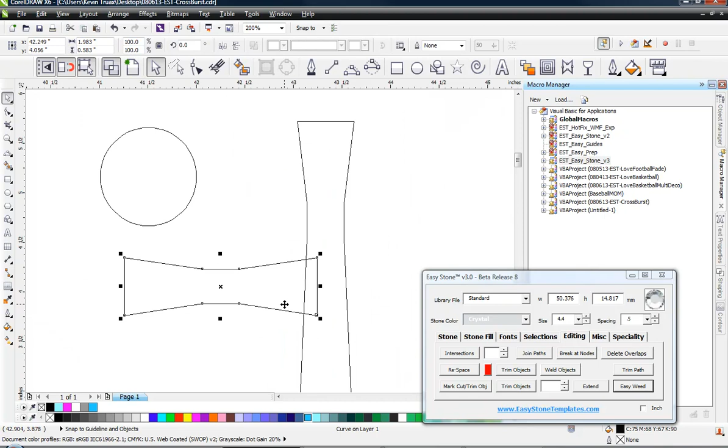So what we want to do, first of all, is take our circle piece in the middle and just make a smaller version of it. So all I did was simply start dragging it, holding my Shift key. It will drag to the center, and then right-clicking to make a duplicate of it. Now I'm going to resize my cross and all its bits to 7 inches tall, or thereabouts. You know, you can kind of play with that value a little bit. And then what I want to do is take all the pieces but my duplicated circle. So we'll go ahead and select this piece, and this piece. Come to the editing tab here in EasyStone and choose Weld Objects, and that will weld them, leaving this circle.

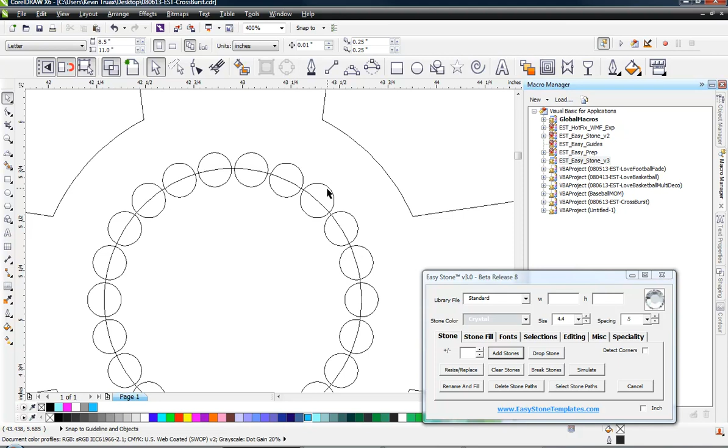And then what we're going to do is come to the Stone tab, and we're going to choose Add Stones. And that will add a series of stones. Now, I have to determine how much space from the stones to the edge I want. And maybe I want less space. So what I'm going to do is stretch it out, again holding my Shift key, stretch it out. And we're going to add some more stones. So I'm going to delete this value because we don't want 22 stones, we want it to recalculate. So when I hit Add Stones, then it will recalculate. And it shows us now we have 25 stones along that path.

Now, I might just drop this down 1 stone, and I'll show you why here in a moment. But now what I want to do is take these stones and break those stones from the path that they're on. So we'll hit Break Stones. And then I'm going to take this stone, which is right at dead center—that's why I lowered the stone count 1. So now this stone is right dead center.

And we're going to come over to the Stone Fill tab, and we're going to hit our right arrow. And then watch what this does—this is another little side point. Obviously, if we hit the right arrow, we make another circle, right? But there's some modifier keys that we can use as well. So if we hold down the Alt key and hit this arrow, you can see what it does—it actually moves it 1 whole stone. Now, if we hold the Alt and Control keys down, then it will nudge it, but only half a stone distance. So those are the modifier keys that we have available.

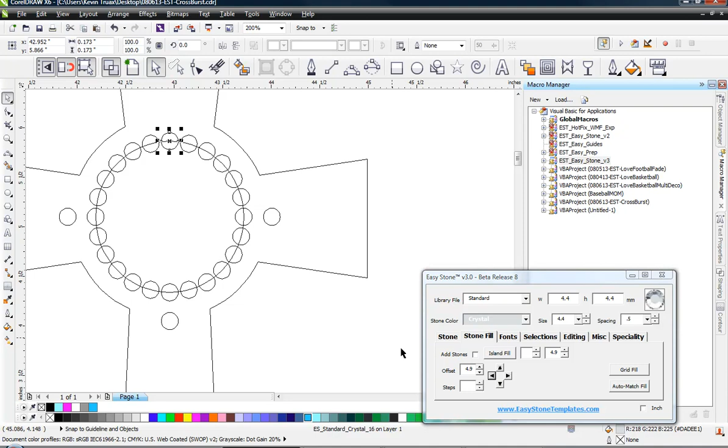So we're going to duplicate the stone and then hold down the Alt key. That will nudge a full stone, and if we hold the Control key in addition to the Alt key, it will nudge, but only a half a stone. And that's what we're going to use. So over, Alt Control, over to get the nudge. Up, Alt Control, up to get the nudge. All right, so that is now what we have available to us.

You can see it looks really nice and symmetrical and what have you.

Now the next step is to work our heat press vinyl object and cut some holes. We could do something really simple: select these 4 outside stones just to show the example, then select our cross, and come over to the editing tab and choose trim. That will cut a hole in our vinyl material the exact same size as our stone.

But here's where the problem is. The rhinestone we're using to create a template is 4.4 millimeters, but the rhinestone itself is actually only 4 millimeters since we're using an SS16 stone. So if we do it the way I just did, our circle size in the heat press vinyl material will be bigger than our rhinestone, and you'd see a tiny edge around the perimeter where the shirt color shows through.

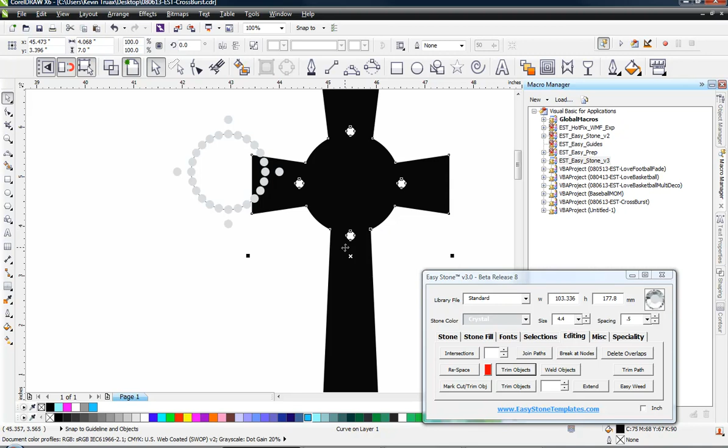So what we need to do is create a circle that is smaller than our rhinestones. If I move this out of the way, you'll see it actually cut 4 circles, but again these are 4.4 millimeters, bigger than the rhinestone itself. That certainly has its place—we may want that effect to have a little rim around our rhinestone, which can add design appeal. But in this case, that's not what we're looking to do.

So we have a built-in functionality here inside EasyStone that's a bit hidden we want to show you. We'll select one stone, then select by fill, create selection. That selects all the stones of that same color. There's actually a defined path, a stone path in there as well, which is why I went through the trouble of asking EasyStone to pick up all stones matching that color, so our defined path is not selected.

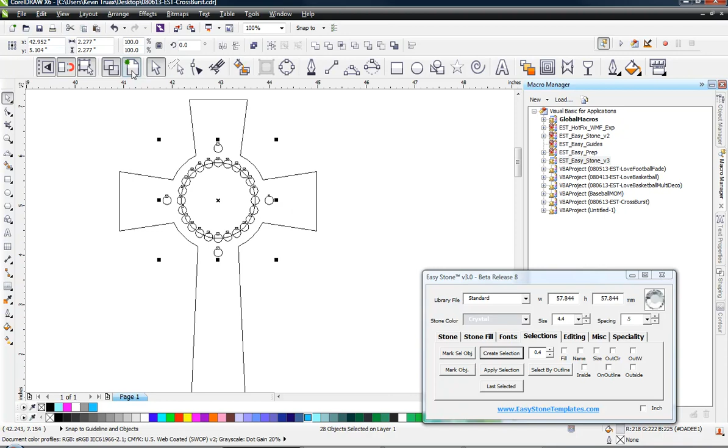So now we have this selection made. But actually we need to back up here and go to the editing tab because we're going to trim our cross piece. We hit mark, cut, trim, and select all of our stones, but we also have our defined path selected, so we'll shift select that to get rid of it. Now we just have our stones selected.

For the trim we're going to use -1 millimeter, and this is where the modifier key comes in. Just like before on our stone fill, we had the Alt and Control options. Well, with Trim Objects there's also an Alt option and a Control option. So if we hit Control Trim Objects, watch what happens—you don't really see anything happen.

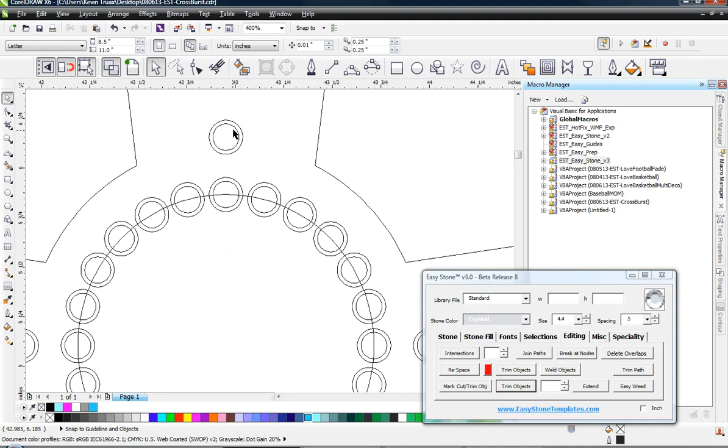But if we go into wireframe mode, then we can see what happened. We got one circle, and then a circle to the inside of that. Now we can see what's happened here—we've actually cut a hole inside our heat press vinyl material.

So I'm going to go back to enhance mode, and I'm going to pull this out, and I want to show you something. I don't want to make this overly complicated, but I do want you to have a good understanding of what's happening so that when you try this project, you'll know exactly what's happening and why.

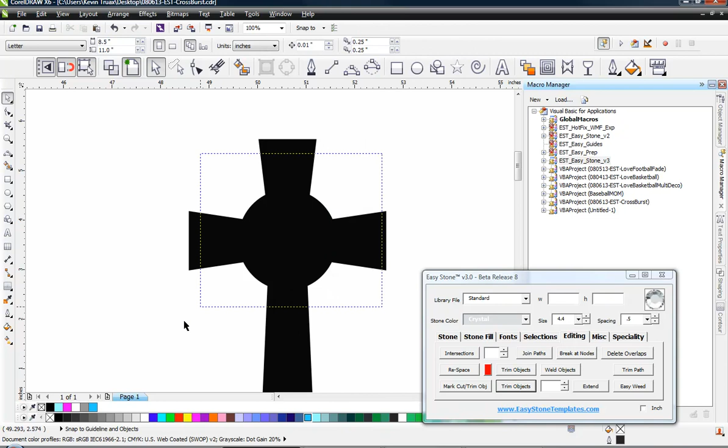So let's break this apart. We're going to right click on our cross and break it apart. Then we have all these other shapes. Let's give them a color, and shift page up so we can see them.

So if we select one of these shapes, notice what size this is—3.4 millimeters. So the original stones, if you recall, were 4.4 millimeters. So the holes cut inside our heat press vinyl material are 3.4 millimeters.

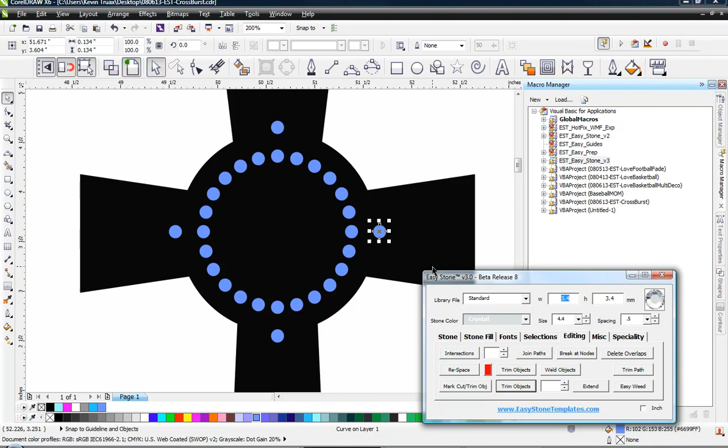So this is what we know: our rhinestone itself, an SS16 stone, is 4.4 millimeters, and the hole we cut in our heat press material is 3.4 millimeters. So our rhinestone is going to be slightly larger than the hole size in our heat press vinyl material, and that ultimately gives us this look of the rhinestone sitting right on top of our glitter material.

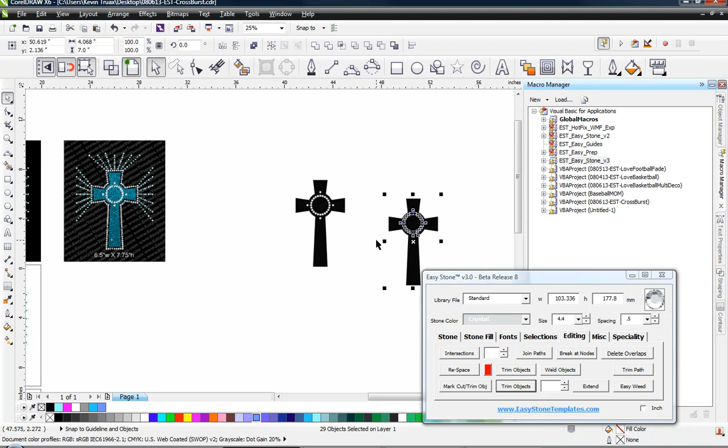So on each side of this rhinestone, there's a 0.5 millimeter gap where the rhinestone is actually sitting on top of the heat press vinyl material or on top of the screen printing ink. But the bulk of the rhinestone is actually adhering to the t-shirt. I just wanted to point that out to you, what's really happening there. So let's go ahead and delete that.

So here's the challenge. If we're doing this type of work, we would have to weed every single circle. Now, this particular design doesn't have a whole lot of stones, but there are other designs where we might want to use this effect and it would have a bunch of stones. Trust me, weeding out every one of these circles would be a real pain.

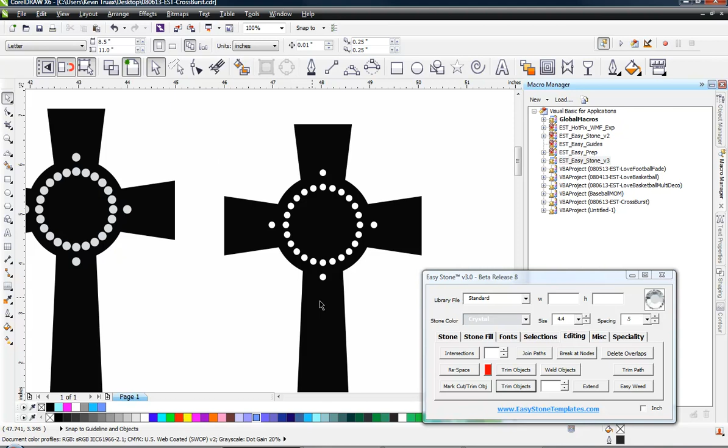So what we've done is created a brand new tool here inside Beta Release 8 to help facilitate the weeding process and make it a lot easier for us. If you're doing screen printing work, we don't have to worry about this step. But when we're doing heat press vinyl material, this extra step will be worth its weight in gold.

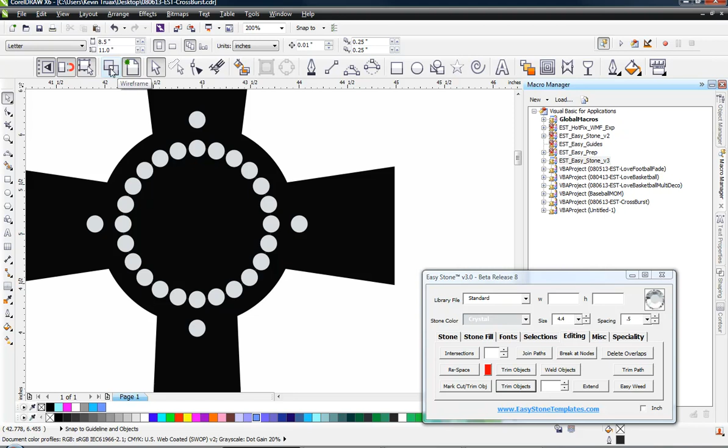So let's go to the wireframe mode so we can see what's happening a little bit better. Remember that stone path that we saved? Well, what we're going to do is select our stone path. Actually, before we do that, under our editing tab, we're going to mark this trim object, mark the object we want to modify, which in this case is our cross shape. So we're going to mark it, and then select this stone path that we have left over from when we added stones. And we have this brand new function called Easy Weed.

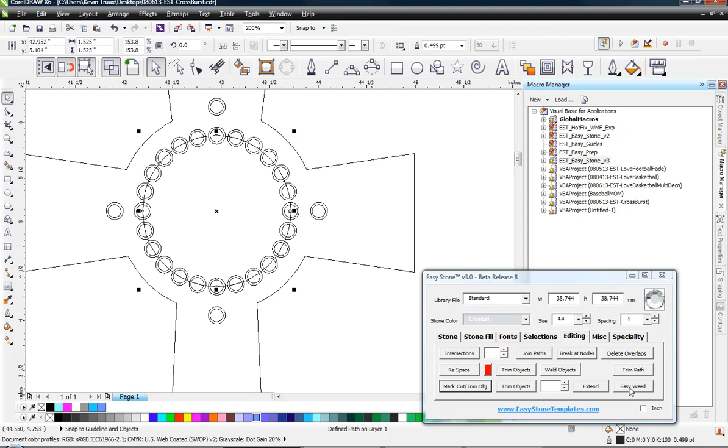And if we click on that button, watch what happens. You see there's a little something that happened there. Let's go ahead and delete our stone path. And now you can see what's happened. We've created this little channel in between each one of these circles.

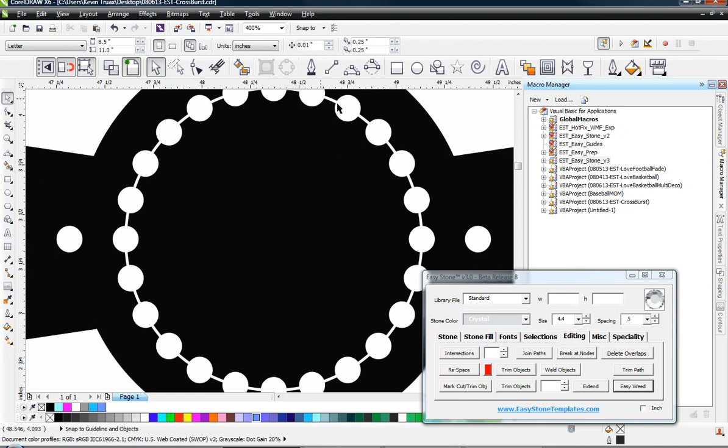So if we go to Enhanced mode here and pull this out, you can see this more clearly. So you see that little channel that we created between each circle? We would have to weed these 4 circles, but all of these circles, because of that little channel we used in between each one, now these will weed in one whole strip versus individual dots. Okay, so it really helps the process of weeding.

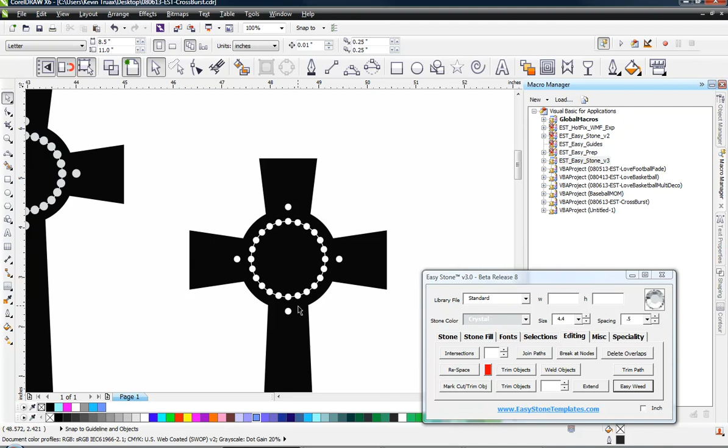And because the stones are so close together, you won't see that tiny little gap. And even if you did see that tiny little gap, it's pretty insignificant from a distance. I mean, you'd have to be right on top of it to even see that there's a little bit of a gap there. But from a weeding perspective, it makes the whole process much, much simpler. Okay, so that's just a little bonus tip for you on that part of it.

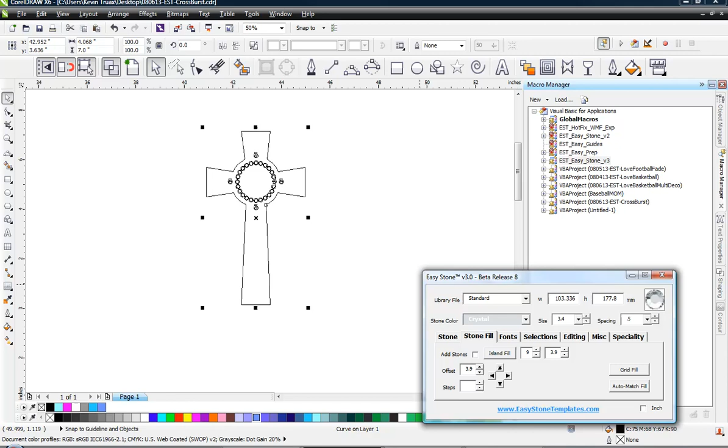So let's go ahead and finish this up. What we're going to do here is go to the Stone Fill tab, and we're going to choose, in this case, SS10 stones. We'll use 9. And if I right click on Island Fill, you can see it gives us 9 steps to the outside.

And then what we'll do is hold on our Alt key, and select everything but our original cross. Come to the Stone tab, and we're going to hold Alt, Add Stones. And we're going to add stones all the way around the design.

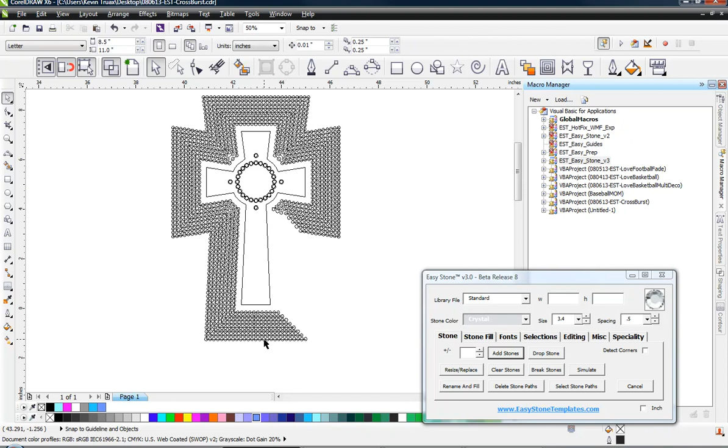And then we're going to get rid of certain lines that we're not going to use. The way I'm doing that is just holding down my Alt key, selecting a few lines, and then deleting the ones that we're not using. So I'm not going to use this one. And we didn't do anything at the bottom, so we'll go ahead and delete that. And we'll delete these. I'm just holding down my Alt key and marking over the stuff that we're not going to use. Same thing over here.

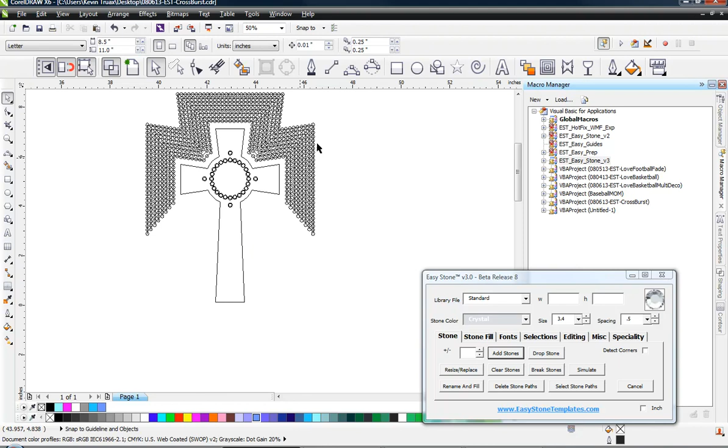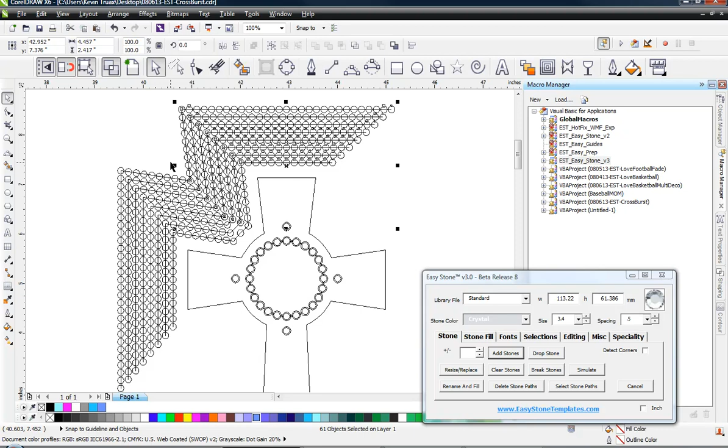Now the left and the right is the same, so there's really no need to do both sides. We'll do one, and then we'll flip it over and do the other. And in this particular design, the top part of the design is also symmetrical, so we don't really need to concern ourselves with that either. So let's go ahead and delete that too, because we don't need that. So this is all we really need to concern ourselves with, right here.

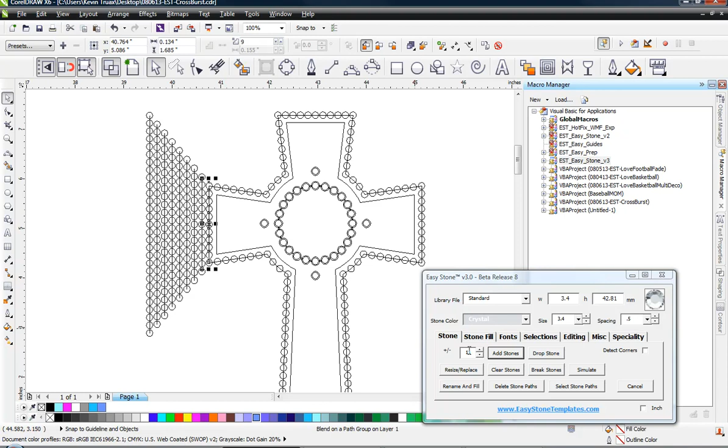This first row has 11 stones. So if we Alt drag all of these and type in 11, then add stones, that's how we got that sunburst effect from our original design. Now we don't need all our stone paths, so we'll select the whole design and click Delete Stone Paths to get rid of all of them.

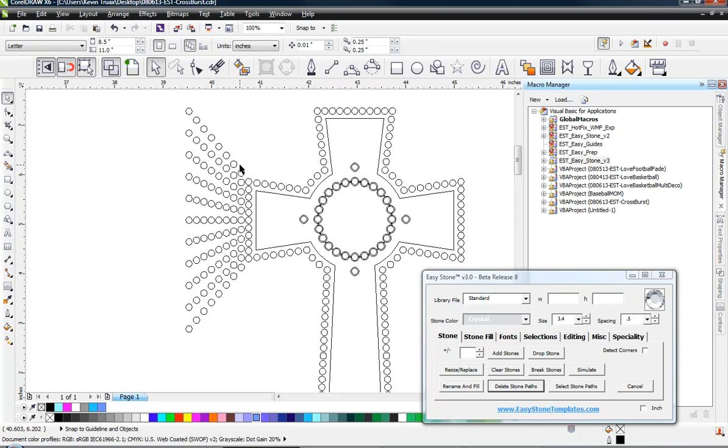Let's go back to Enhanced mode so we can see this a little better. So then all we do is come in here, and what I did is I selected every other stone. We'll go ahead and choose Capri Blue, and choose the Rename and Fill option, then do the same thing, selecting every other stone.

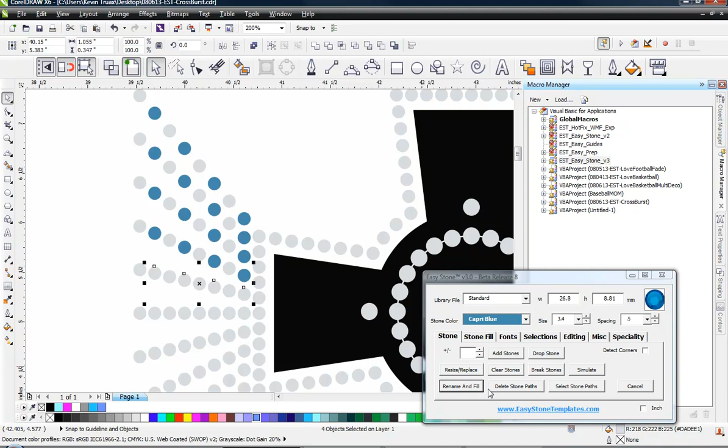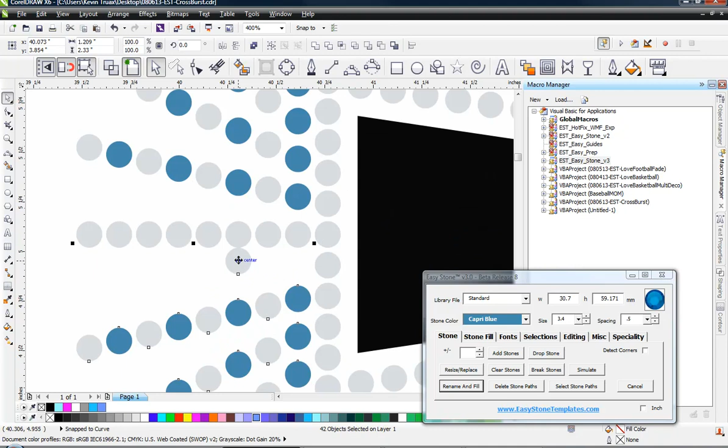Now the bottom half is the same as the top half, so probably what I would do is delete our bottom half altogether and just mirror the top half. We'll select this top half, select one of these stones dead center, pull down this control handle, hold the control key down, right click, pick up from the center of this anchor stone, and drop it back. Now you have the exact same thing, top and bottom.

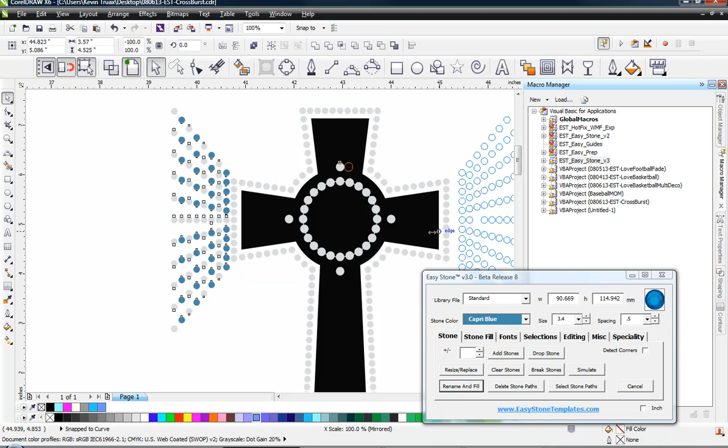So then we need to do the same thing going left to right. We'll select all of these stones, hold the shift key and select one of our horizontal center stones, pull, hold control down, right click, pick up from the anchor stone, and now you can see we have the exact same placement on the right as we had on the left.

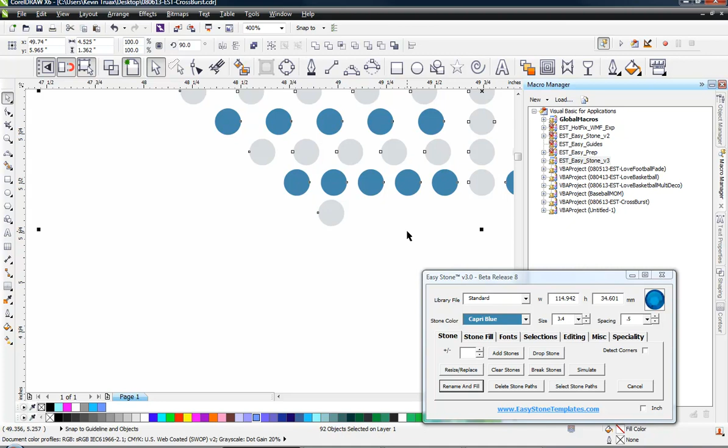It's basically the same process across the top. We select all of these stones, and we need an anchor stone, so let's use this one. We pull it over, right click to make a duplicate, click on it again, and that gives us our rotation handles. If I hold down control, it constrains to certain angles. This is my anchor stone, so if we pick it up from center to center, across the top we get the exact same placement as along the sides.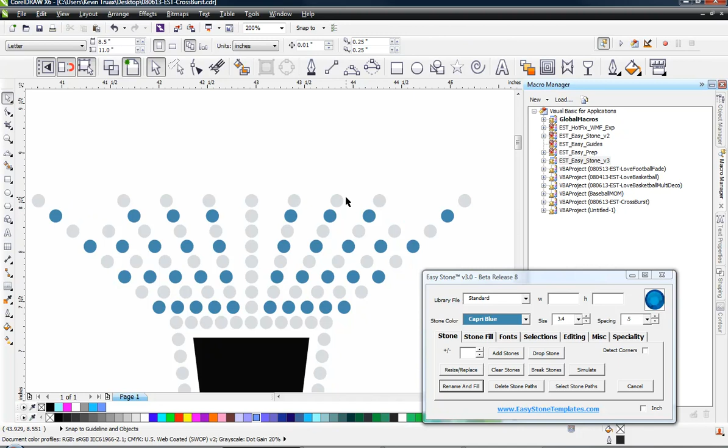Now across the top we may want to do something a little different just for fun. I'm going to delete a couple of stones here, mimic that over here, and maybe do the same thing here. You can do this or not do this, it just gives it a little something extra, and then maybe in the middle I'll add a couple of stones just for fun.

Now we do have some stones on top of stones, so what we're going to do is select those stones, come to the Miscellaneous tab, and hit Check Spacing, which will delete all those overlaps. We'll do the same thing on the bottom, and Check Spacing found 2 overlapping stones.

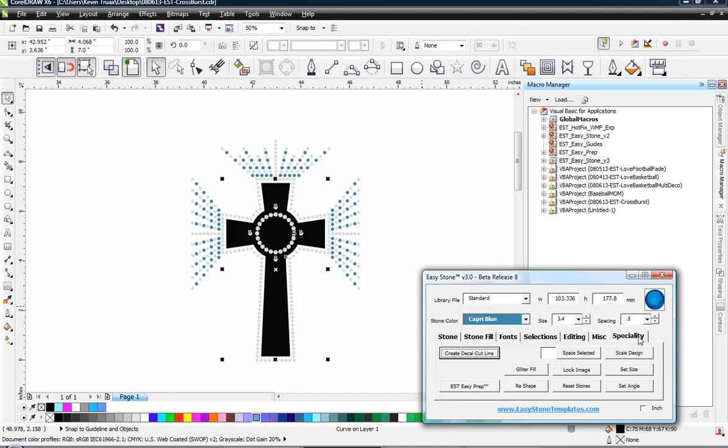To finish this design off, let's give it some glitter. We'll come over to the Specialty tab and pop open our glitter, and I think I used aqua in my demonstration. Then let's add a weed box, so we'll go back here and right click to add a weed box, and that is the finished design. I guess we can go ahead and simulate it if we want to as well.

And there we have our completed project. I think it looks really good.

I think what I did, I'm going to go ahead and select that Capri Blue stone, and I think what I actually used here was blue zircon. So let's try that, we'll hit Rename and Fill, switching all those Capri Blue stones to blue zircon, and I think that works better with our aqua glitter color. Yes indeed, that is a better match as far as the different colors go.

That aqua is from Specialty Materials, the glitter material we carry here. So anyhow, that gives us the finished look of how we created that design. And the big thing here is the special setup with that little channel to make weeding of all these little circles easier, with the new feature here, the Easy Weed feature in Beta Release 8.